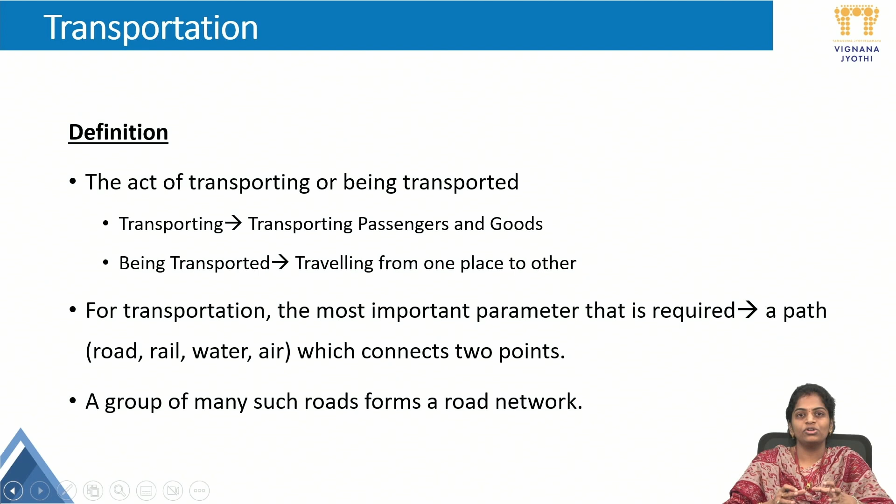This group of roads will form a road network, and this network is important for us to act as a transportation system.

Coming to the importance of transportation, without it there are lot of disturbances happening. Proper transportation is required for smooth movement of people and goods. This ensures better economic stability of the country, and a larger network of road provides better access and opportunities to all sections of people, because we go to jobs, education systems, and all these are connected with transportation.

Better road infrastructure ensures lesser accidents and fatalities, and provides better social security to people in all sections. If we have any emergency health issues, with proper transportation we can go to better hospitals immediately and get good access.

India, being a highly diverse country, has better exposure to all the cultures from all parts of the country, as these cultures are developed with transportation connecting all the parts of the country.

Transportation has a very important role in the development of the country. It helps in developing the economy properly, like value of goods, standard of living, and industry. If there is proper transportation in a locality, there will be more industries and easy production and distribution of things.

Cultural heritage will be improved. More jobs will be created because of transportation, and more emergency movements will be possible, like hospitals, giving value to the country.

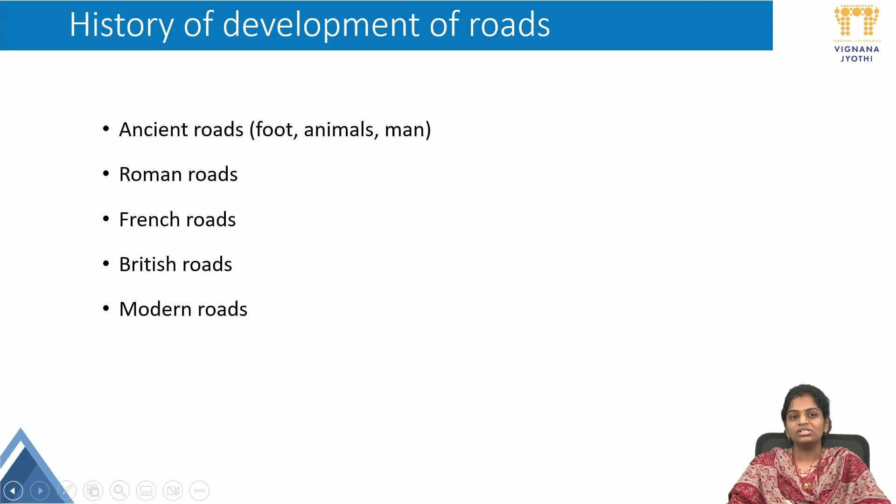Next topic is the history of development of roads, how roads have developed from ancient times to modern times. The development happened as: first ancient roads, then Roman roads, French roads, British roads, and then modern roads.

Coming to ancient roads, people used to travel previously in ancient times only by foot. There were no proper roads, vehicles, or goods transportation. Only through foot did people used to travel.

Invention of the wheel led to the development of animal drawn vehicles. After the invention of the wheel, animal drawn vehicles were developed and the need for hard surface roads emerged.

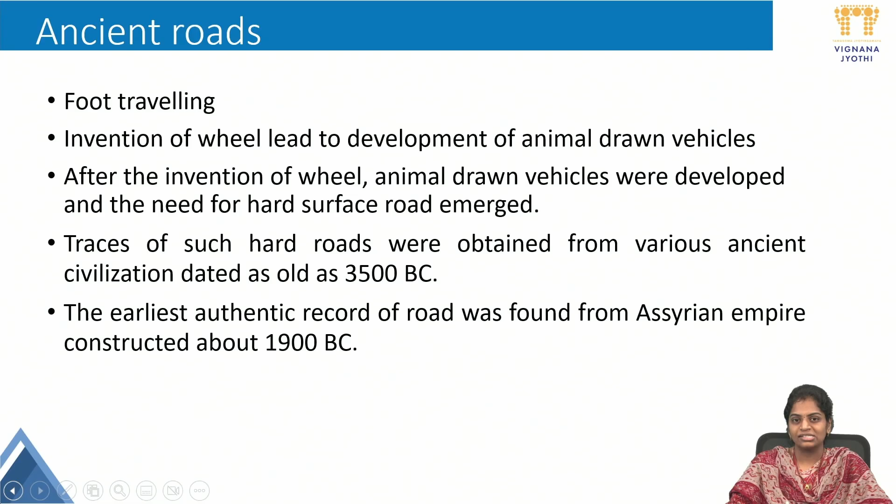The oldest mode of travel was on footpaths. There was no proper road or proper vehicles, no proper path. People used to travel like this. Transportation in olden days was by men and animals; they used to transport on animals and travel by walk.

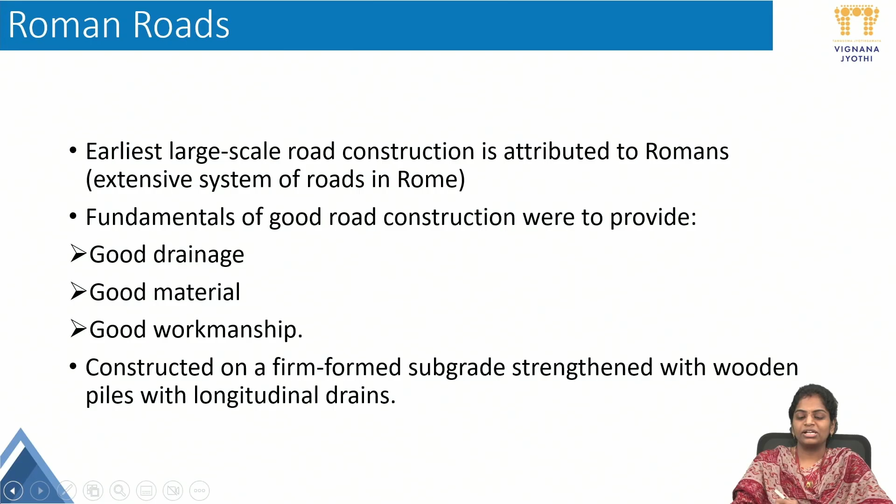Then came the Roman roads. After ancient roads, Roman road construction started. The earliest large-scale road construction is attributed to the Romans. Fundamentals of good road construction were to provide good drainage, good material, and good workmanship. Romans concentrated on these three important factors.

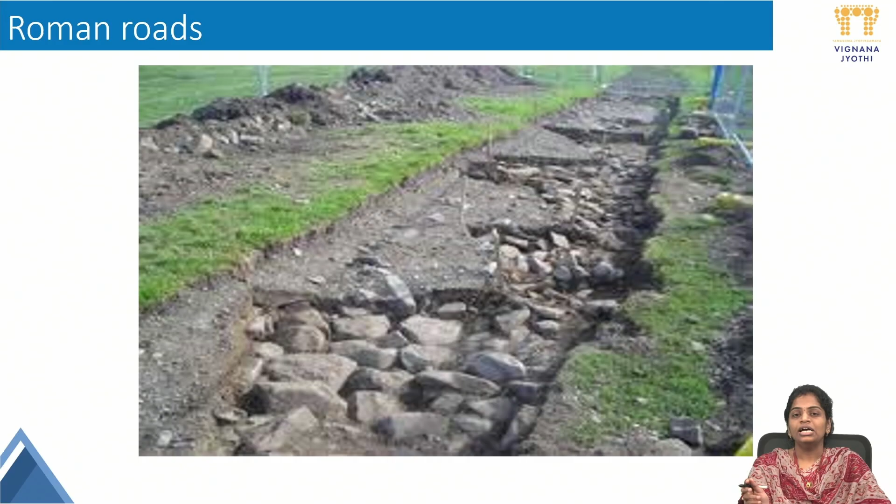Coming to the Roman roads, if we can see these roads, they used hard stone blocks laid as a path. All these are examples of the Roman roads.

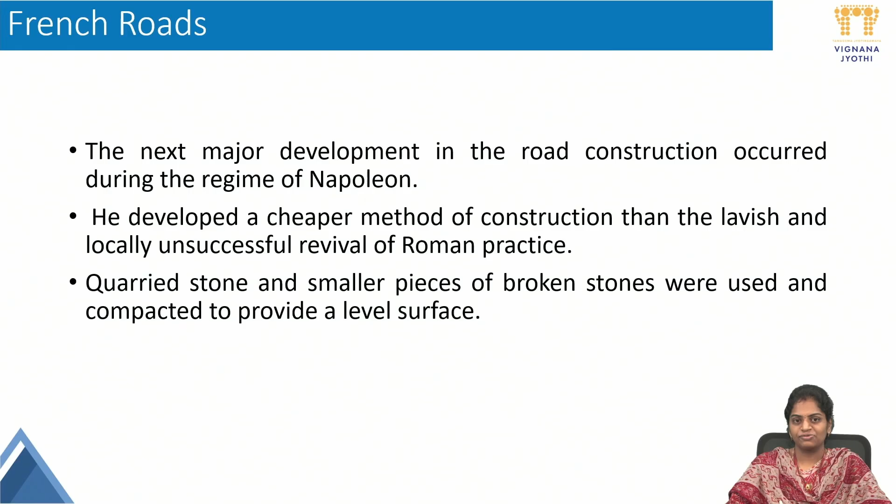Next came the French roads. The next major development in road construction occurred during the regime of Napoleon, a famous historic leader. He developed a cheaper method of construction than the lavish and locally unsuccessful revival of Roman practice.

Quarried stone and smaller pieces of broken stones were used in French roads. The Tresaguet construction is famous, in which drainage and lesser thickness of road are the important features of this construction.

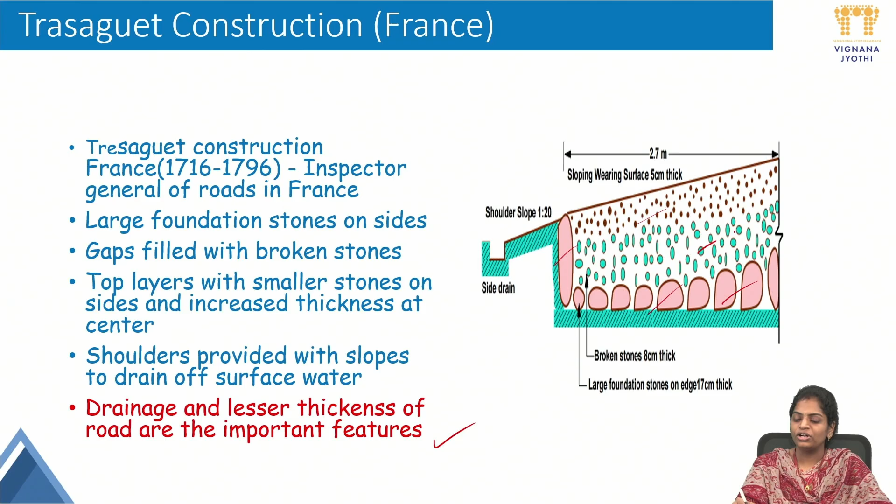Gaps are filled with broken stones and large foundation stones are laid on the sides. As we can see in this figure, large stones are filled on the sides and broken stones are filled in the middle. This is the Tresaguet construction principle.

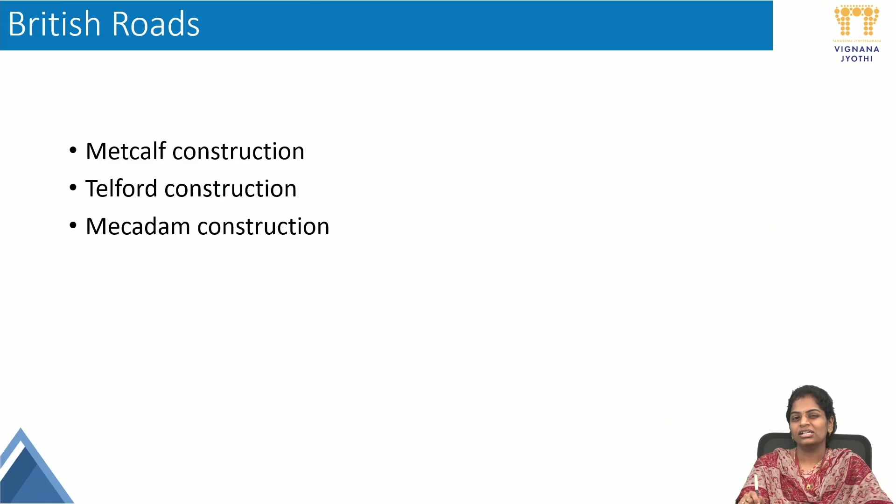Next, coming to the British roads. They have three types of British roads. After the Roman roads and the French roads, the British came to our country and started road construction. There are three types: Metcalf construction, Telford construction, and Macadam construction.

In Metcalf construction, he was responsible for road construction of around 290 kilometers in the northern region of England. He insisted on good drainage and a good foundation for the road.

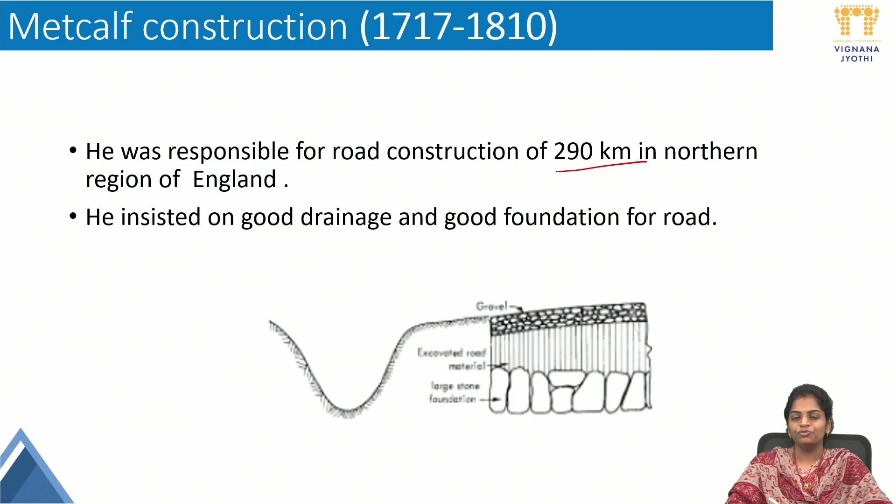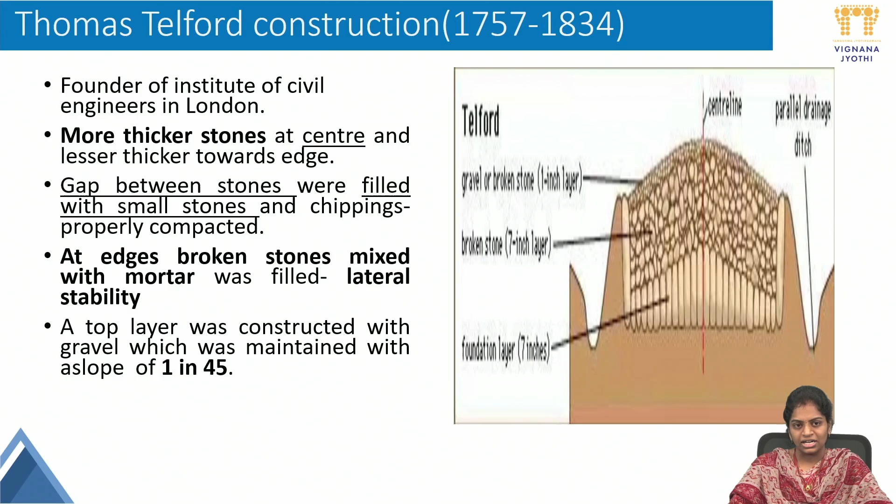Next came the Telford construction. As we can see, thicker stones are used in the center and lesser thickness towards the edge. These were the founders of the Institute of Civil Engineers in London. A top layer was constructed with gravel, maintained with a slope of 1:45.

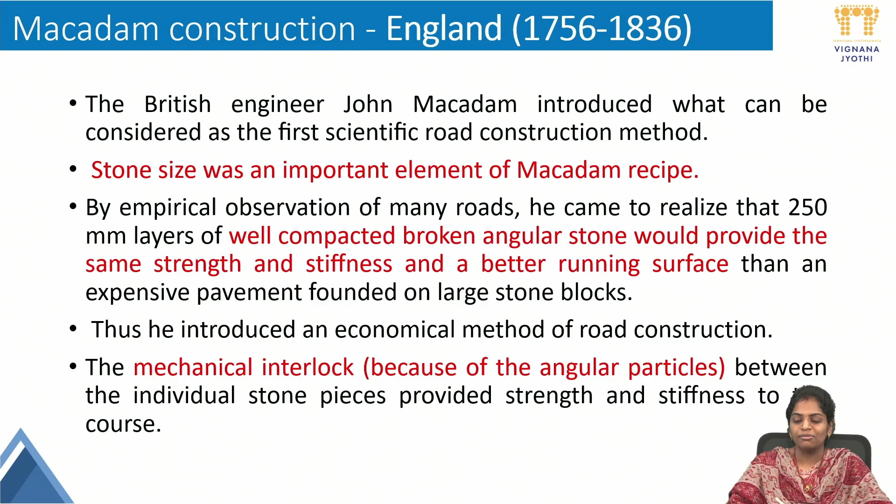Next came the Macadam construction. This is the most important and scientific road construction method, which we are still following all over the world. Macadam implemented stone size as an important element in his recipe. He created this most scientific method of road construction.

He was the first person to think in a scientific way about load distribution. Macadam construction was mainly based on the load distribution of the road. Load distribution happens in layers of the road. This is the most important feature of Macadam construction.

The road is constructed in layers and load is distributed across those layers. That is the most important thing. Better performance is seen in Macadam construction than all other methods, and we are still following Macadam construction as the scientific method for road construction.

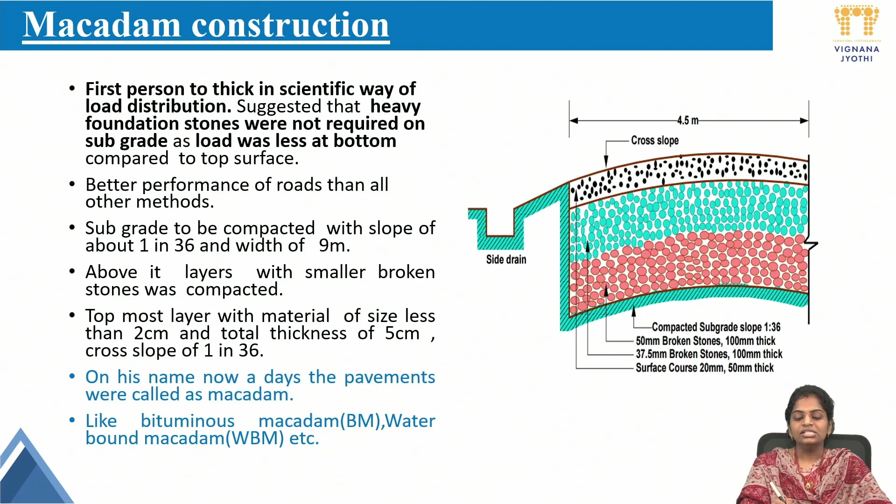The subgrade is compacted, and above its layers, smaller broken stones were placed and compacted. After the Macadam construction, all modern roads were built following this method, and modern roads everywhere by and large follow Macadam's construction method only.

So the use of bituminous concrete and cement concrete are the most important developments. As we can see, most of our roads in India are bituminous concrete and cement concrete roads.

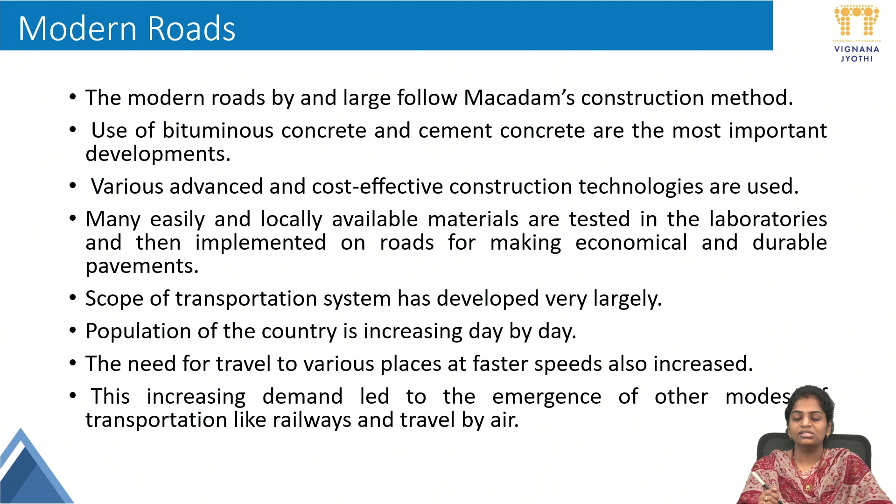The scope of the transportation system has developed very largely because of modern roads. The need for travel to various places at faster speed also increased. This increasing demand led to the emergence of other modes of transportation like railways and air travel.

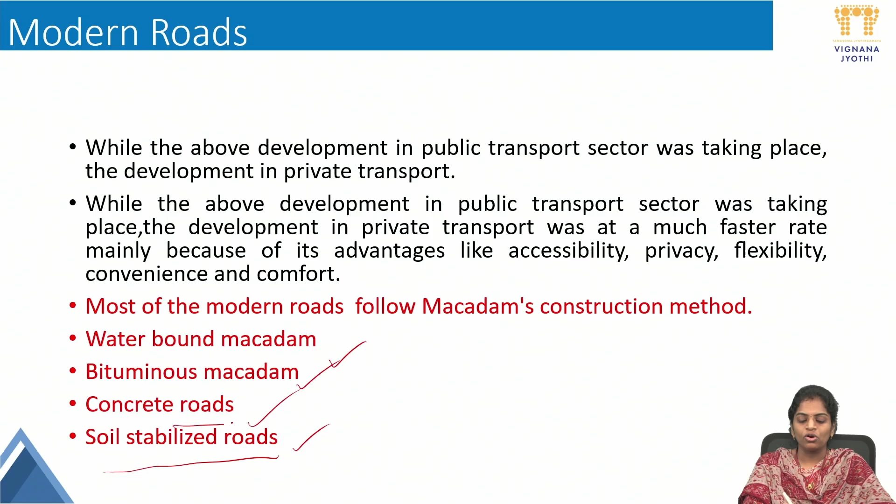Concrete roads are the most recent development in road technology. The cement concrete pavement has a lifespan of nearly 30 to 40 years. The initial cost may be high, but it has a long lifespan, durability, and more strength as well.

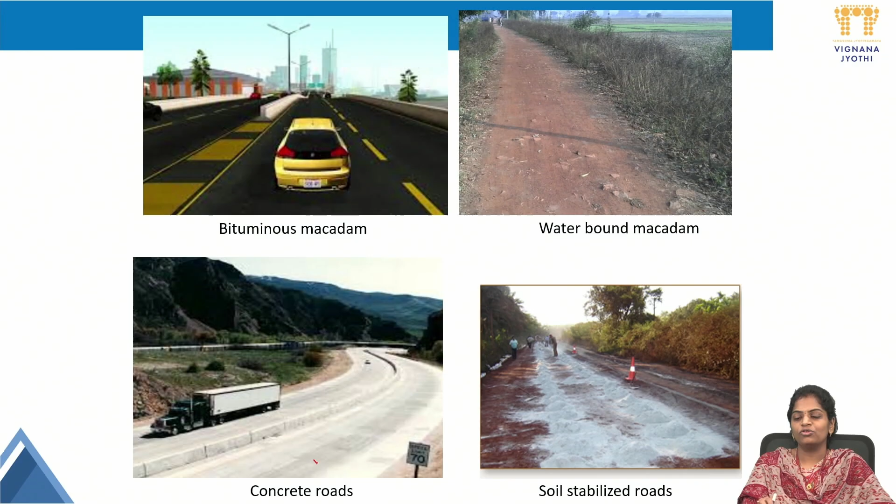The last one is soil stabilized roads. We can see in villages that there is still no proper paved surface on such roads. These are the four types of roads which we are generally following in road construction.

After this, we will move to highway development in India. How has the development of highways been done in India? The entire highway system, national highways and state highways, was not developed or constructed in a particular day, year, or night. It took many years to come to this stage of highway development.

Starting from 1927, highway construction started in India. Coming to the Jayakar Committee, these are the important landmarks of highway development, as shown in the slide: the Jayakar Committee, Central Road Fund, Indian Roads Congress, Motor Vehicles Act in 1939, Nagpur Road Plan in 1943, and the Central Road Research Institute.

The second 20-year road development plan, the third 20-year road development plan, National Highway Authority of India in 1988, National Highway Development Project in 1998, and PMGSY, Pradhan Mantri Gram Sadak Yojana, in 2001. Each one of these will be discussed; let us go into detail.

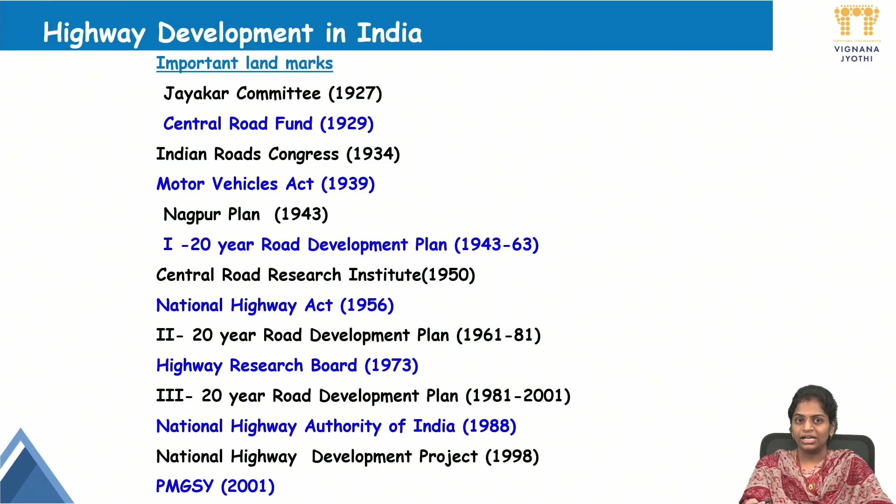First one is the Jayakar Committee recommendations. The initial highway construction started with the initiative of Mr. M.R. Jayakar, who was the chairman of the Road Development Committee, started in 1927. He was a member involved in the improvement and monitoring of roads.

He gave some recommendations, as we can see: road development should be prioritized and considered a national interest. Until then, road development was not considered a national interest. After the Jayakar Committee's recommendation, it was the first to suggest it should be considered a national interest. Then came the question of how to get money for road construction.

An extra tax should be levied on petrol towards the Central Road Fund (CRF). It should be collected—that is the second recommendation given. And who will monitor all this?

The third recommendation is that a semi-official technical committee for better research and advancements in road infrastructure should be formed. As per instructions, the CRF was formed in 1929, the Indian Roads Congress was formed in 1934, and the Central Road Research Institute (CRRI) was formed in 1950. This was the recommendation of the Jayakar Committee: a semi-official technical body should be there for research and advancements.

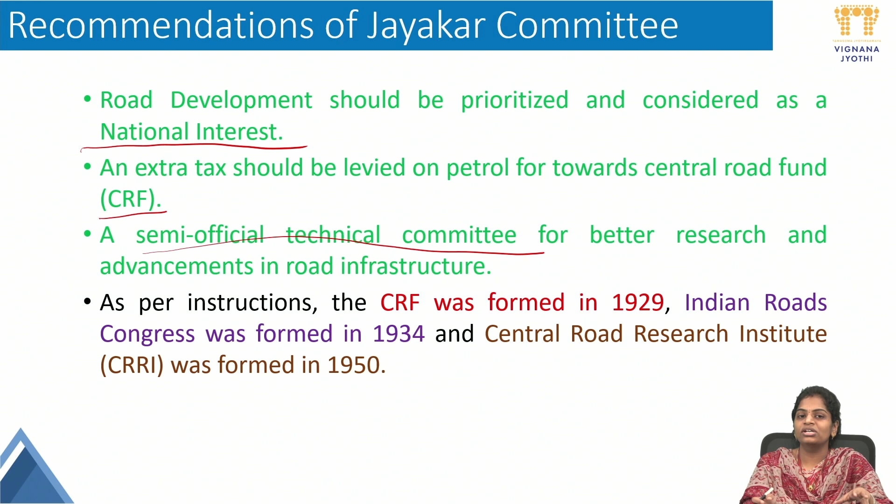Highway construction started in 1927, but there has been a lot of research since then. So that research and all the developments and technicalities should be discussed in a technical committee. The committee recommended by the Jayakar Committee was formed as the Indian Roads Congress, which gives us all the codes, in 1934, and the Central Road Research Institute, which takes care of these things, in 1950.

Next, coming to the Indian Roads Congress 1934, this was formed from the recommendations of the Jayakar Committee. It publishes various codes, standardizing specifications based on demands, based on materials available, based on other factors, and based on safety. Based on the safety of the users, this gives more specifications. IRC provided a platform to present technical opinions for professionals around the country and globe.

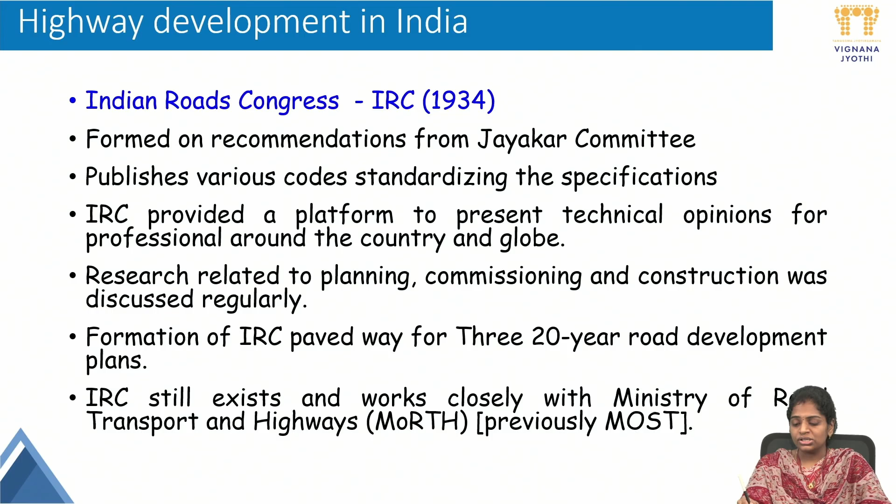All the people around the country and globe follow this, come here and discuss. They can discuss their opinions and share them. IRC still exists until now, and it works closely with the Ministry of Road Transport and Highways.

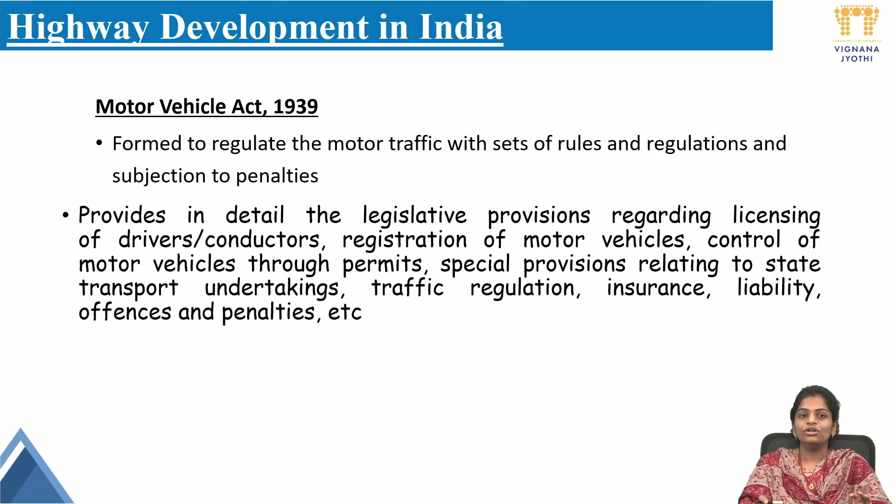Next came the Motor Vehicle Act 1939. This was formed to regulate motor traffic with a set of rules. We all know about licensing of drivers, control of motor vehicles through permits, and special provisions. All these regulations were given in the 1939 Motor Vehicle Act.

Next came the road development plans. Highway construction started with three road development plans: the Nagpur Road Plan, the Bombay Road Plan, and the Lucknow Road Plan. These are three 20-year road plans, totaling a span of 60 years for construction of the basic road structure or national highways in India. The first 20-year road plan was the Nagpur Road Plan, from 1943 to 1963.

They kept a target of 16 kilometer stretch per 100 square kilometers of land, but for every 100 square kilometers they actually constructed 16 kilometers of road stretch, and this was completed in 18 years itself, by 1961. Then CRRI was formed in 1950, and it still exists and stands strong in the heart of Delhi, the Central Road Research Institute.

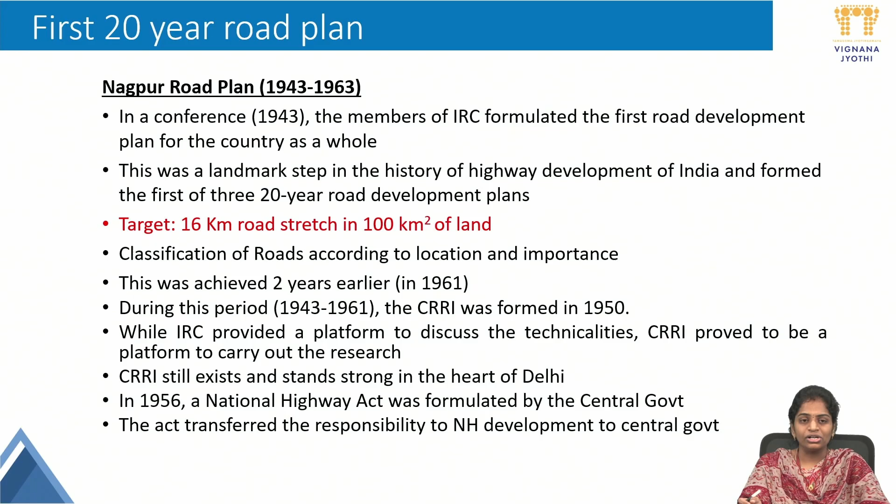Then after this, the National Highway Act came in, around 1956. This Act says that the responsibility of development and maintenance of National Highways lies completely with the central government. The entire process of National Highway construction, maintenance, and operation is dealt with by the central government only.

Then after the first 20-year road plan, we came to the second 20-year road plan, from 1961 to 1981, also called the Bombay Road Plan. So the first one is the Nagpur Road Plan and the second one is the Bombay Road Plan.

The target of the Nagpur Road Plan was 16 kilometers for every 100 square kilometers of area. Here, in the Bombay Road Plan, it is 32 kilometers per 100 square kilometers of area. In this second 20-year road plan, they had an important addition: construction of 1600 kilometers of expressways also, along with the national highways.

This target was completed by 1981, and they entered the third 20-year road plan, from 1981 to 2001, also called the Lucknow Road Plan. Here the target is 82 kilometers for every 100 square kilometers of area, and expressway construction is about 2000 kilometers.

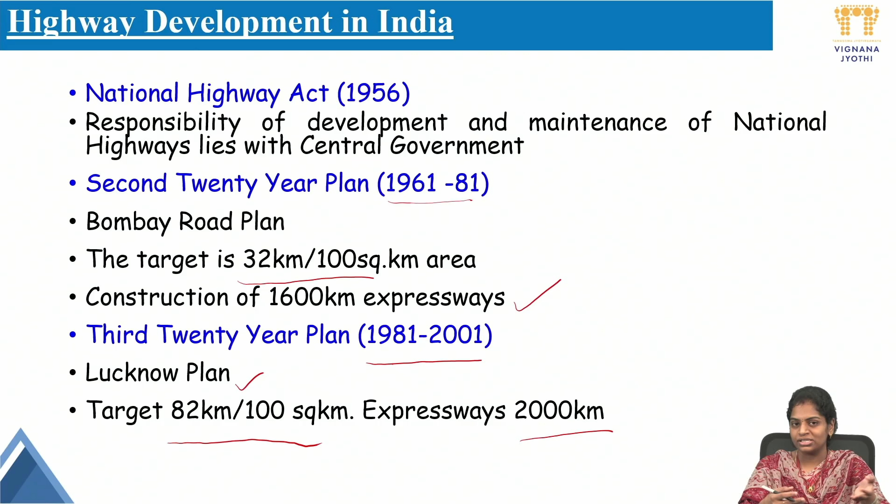If we observe, they started with 16 kilometers, then 32 kilometers in the second 20-year road plan, and 82 kilometers in the third 20-year road plan. In the same way, they started construction of expressways too: 1600 kilometers in the second 20-year plan and 2000 kilometers in the third 20-year plan.

Next came the National Highway Authority of India, established in 1988, which became operational in 1995. This National Highway Authority of India looks after the development, maintenance, and operation of national highways. After construction, we need to maintain operations, so NHAI looks after all these things.

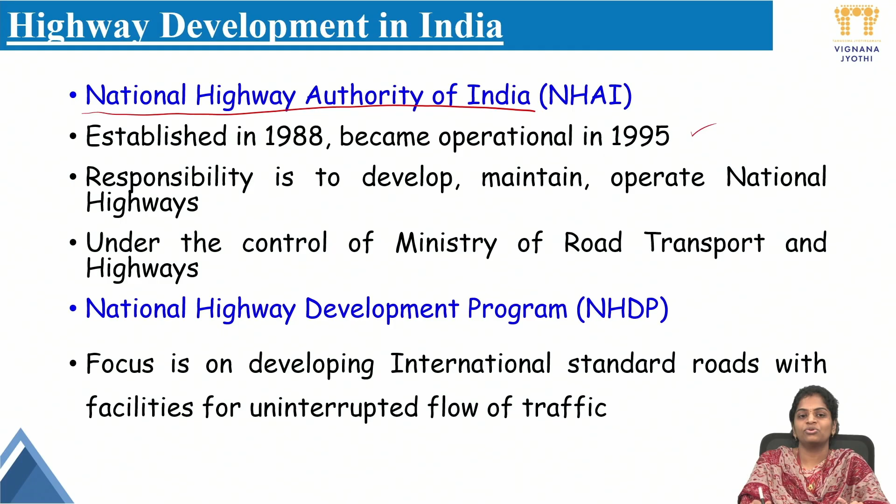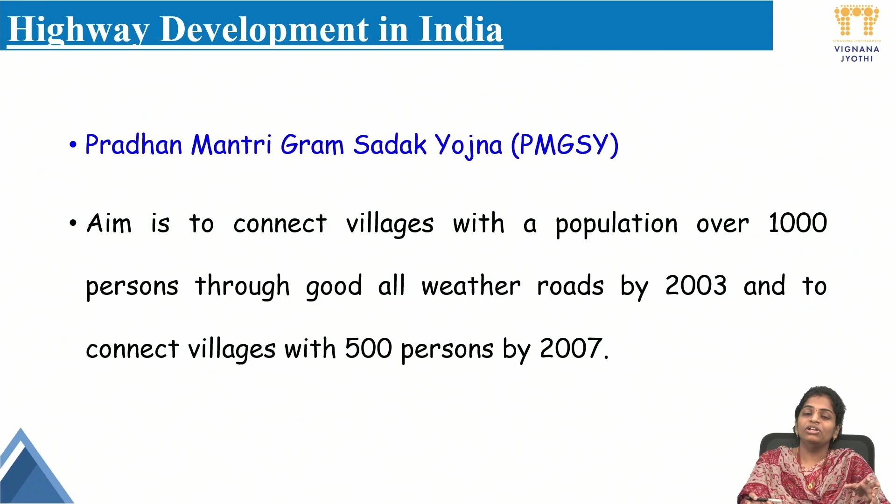Then the National Highway Development Program is one of the programs which focuses on developing international standard roads with facilities for uninterrupted flow of traffic. Next came the Pradhan Mantri Gram Sadak Yojana, whose important agenda is to connect all villages with the main national highways, since the highways were already constructed, to merge villages in and increase accessibility.